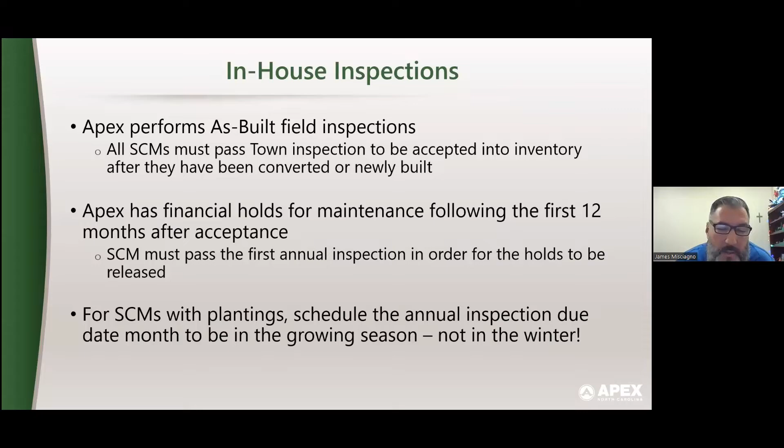So also, when it comes to SCMs, when you are scheduling your recently converted SCM, what month do you want those annual certifications to come in? Schedule your constructed wetlands and your wet ponds in the growing season, even if it's not 12 months from when you accepted it. I think it's extremely important that when third-party inspectors, throughout the life of the project, are looking at these SCMs and seeing the plants and everything that's supposed to be in there, it just reduces the amount of questions that come in. And it is better to see that annual certification come in with all the plantings that are supposed to be there.

So we are very fortunate in Apex. Like I said, we do have a dedicated staff member that performs our inspections. I'm very familiar with Phase 2 permits. I can't really speak to some of the other permitting out there and what the requirements are, but most Phase 2 permits do require in-house inspections every 5 years by the jurisdiction. So some municipalities may do 20% a year, things of that nature.

But here in Apex, we have found a new level of service by having a senior environmental specialist that basically owns our post-construction program. And he is looking at every single facility that we have. And currently you'll see here, we have 520. He's looking at every single one of them annually. And that has brought us a level of service that we have not had since we received our Phase 2 permit. It has been extremely advantageous.

One of the benefits of it is he'll perform these inspections 30 to 60 days before they're due. And by doing that, one, he's verifying the third-party inspections that come in, making sure they're accurate. But also, two, because we have great communication with all these owners and property managers, when he sees something that's out of line or there's a serious issue, especially if there's something impacting our water quality, he has a contact list. He knows who the HOA reps are. He knows who the property management companies are. And at that point in time, he's contacting them saying, hey, we have some serious issues out here. And again, this is prior to it being due.

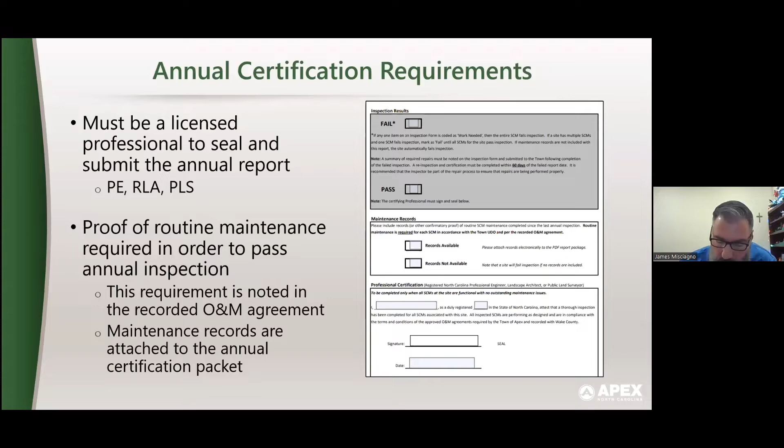That's when they'll go out and have some pond maintenance company or landscaper go out there and do all this work on that SCM. Well, we want to ensure that they're doing it year round, because again, that's what's best for our water quality. And our goal is water quality and compliance. So we mandate that they perform maintenance.

And for most of the SCMs here, when you have an O&M agreement, what I wanted to mention is make sure you have it per SEM, not a broad O&M agreement that covers 13 different types of SCMs. Because when you make it specific, the people who are really not in tune with stormwater, who may be reading these O&Ms, are realizing what their responsibilities are. Because the requirements to keep a bioretention cell and a constructed wetland in compliance may be completely different from each other, right?

So we also require, right from the beginning, O&M agreements, of course, on every SCM, construction plans, landscaping plans, planting lists, and of course the as-built supplements and certification packages when things are done, after they've been converted. So all these documents are key to compliance because, as I'll talk about in the next slide, people are always requesting this information throughout the life of these SCMs.

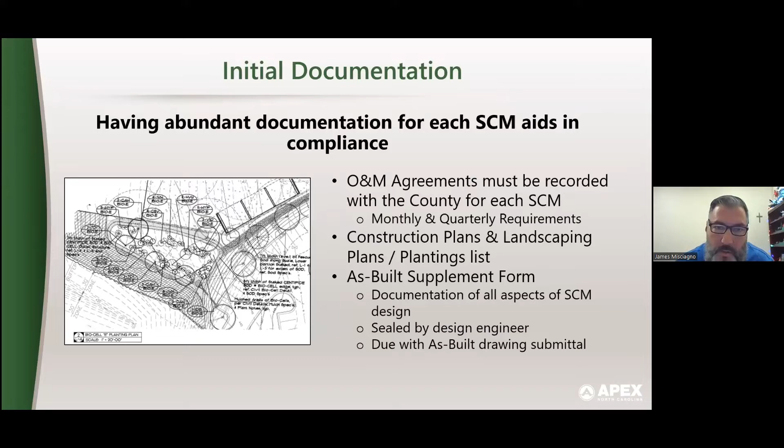So I call this the one-stop shop. So honestly, here at the town of Apex, because we've had such dramatic growth over the last several years, keeping up with the amount of SCMs that we have has been overwhelming to the point where we've had to dedicate someone, like I've mentioned. You may have files everywhere. You may have construction files in one place. You might have inspection files and ownership files here and there. You might have spreadsheets in different locations tracking different things.

And so for us, we're currently working with a private company to develop a stormwater database. And we really want a one-stop shop here. We want to keep it simple as much as possible. But when we get a telephone call, whether it's an HOA person or a resident, or people just requesting information, inspectors, certs, maintenance companies, we want to be able to go to SCM site ABC, pull that up, see the owner's information, the property management's information. Of course, we're talking about contact information here. Telephone numbers, emails, things of that nature. We want to be able to easily access all that information.

We want to be able to easily edit that information as these people change with the wind sometimes, management companies and stuff. But for me, what's most important, because I understand how much time is involved with it, is having your documents all in that same location. So when you do get that call, you can easily pull up an O&M agreement. You can pull up your construction plans, your as-built package, even the landscaping plans and planting list. For me, having all of that in one spot is key to compliance, because as your facilities grow, you're going to have so many people requesting that information on a regular basis.

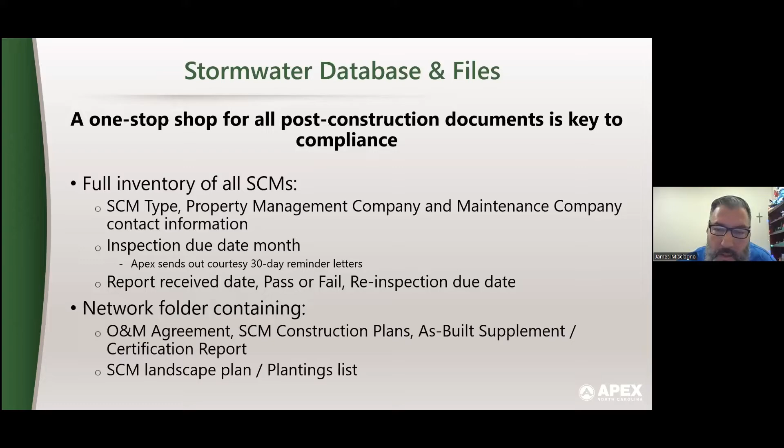It's so much better to not write their information down and tell them you're going to get back with them later, because you've got to pull all this information from multiple files. Now you can go right to your database, pull up the SCM, everything you can drag right into an email. So something to keep in mind.

So near the end here, of course, public information and outreach is another key to compliance for post-construction. Truth is, a lot of people have these stormwater ponds and things throughout their neighborhoods. Most of them don't even know that there's a stormwater feature. So having a good website right off the bat, I think, is key. And one that people can easily find. It prevents a lot of different telephone calls going to different departments before they actually get to yours to get information. So have some good general information on what SCMs are, what their function is.

For us, we have actual SCM inspectors and repair contractor lists on our website. This may save us some telephone calls that we get. People will look on the website and be like, oh, wow, here are some people that we can call to repair or inspect our facilities.

So I think that's extremely important. Meeting with HOAs and property owners on educating them what their responsibilities are, and how these SCMs function. A lot of these people who volunteer their time to be on HOA boards, and most of us know how brutal that is. These are people who typically want to learn things, and they want that education dropped on them. So when they know and understand the function of these SCMs, they're happy to educate other HOA members as they come on board.

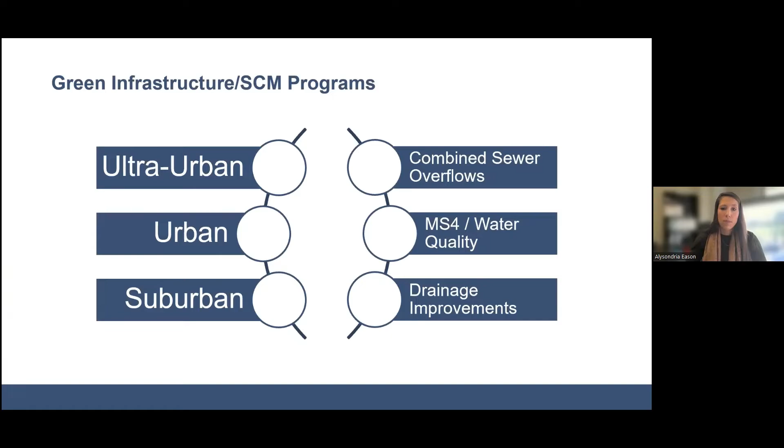So when we think of green infrastructure SCM programs, we can divide them into three main categories: ultra urban or large scale implementation, urban, and suburban. What those environments are able to accomplish and what their goals are generally fall into either combined sewer overflows, MS4 water quality improvements, or merely drainage improvements. Drilling down further into these, it's important to realize some of the main characteristics that may set them apart.

So for example, an urban or a suburban focused program may not have impacts that are as substantial, but they also may not have extensive amounts of funding to focus on stormwater alone, whereas a larger or ultra urban focused program would generally be more limited in space to implement SCMs, but they would have more impacts where they actually need to mitigate stormwater issues. Additionally, some of these larger programs may have larger funding sources to pull from. So it's really a balance of trying to accomplish their goals with what resources you have in front of you.

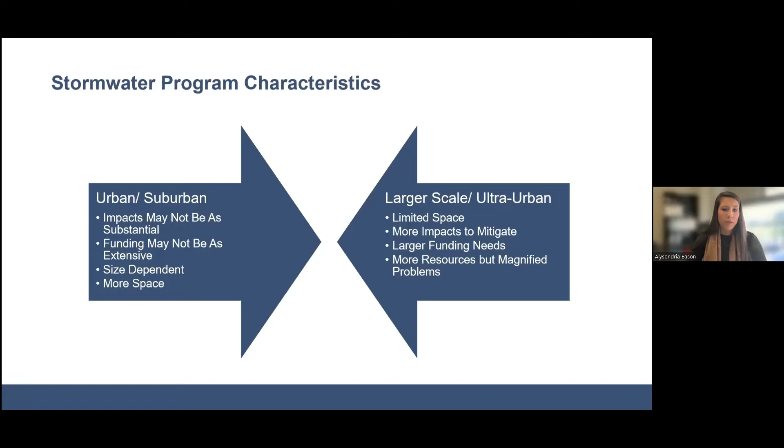So when we think about constraints, the full plethora of options, or things that, regardless of if you're a small program or a large program, a smaller suburban style city or something in the heart of Charlotte, looking at utilities. Some of these utilities have been there for decades and decades, and then others are new. And how does that fill in with capital planning?

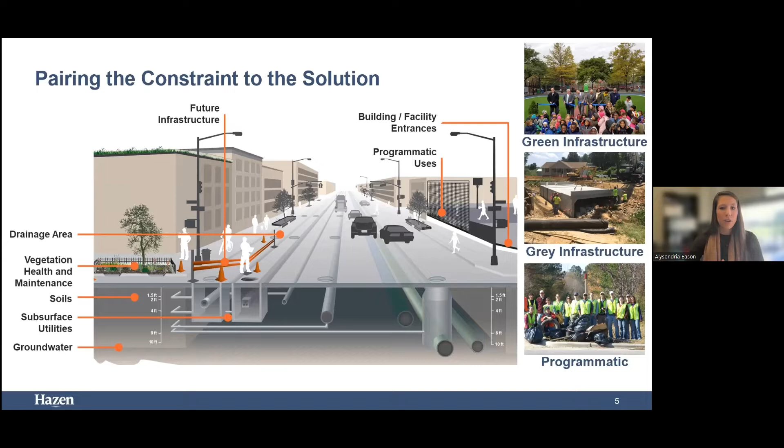So understanding programmatic uses, what existing soils are there, drainage areas, to be able to make sure that any SCM that's implemented is feasible from a cost-effective standpoint. Navigating these constraints is often a combination of green infrastructure, SCMs, gray infrastructure, and then the programmatic use. So it's really pairing the constraint to the solution.

So we plan, we organize, and then we design, because that format generally sets us up for long-term implementation, regardless of the size of your program. So for larger programs, they may already have more established program goals. And so they've already taken a look at what types of information are we interested in? Where do we need to be able to come back to look at, okay, we've already looked up this entire neighborhood and these are our only options.

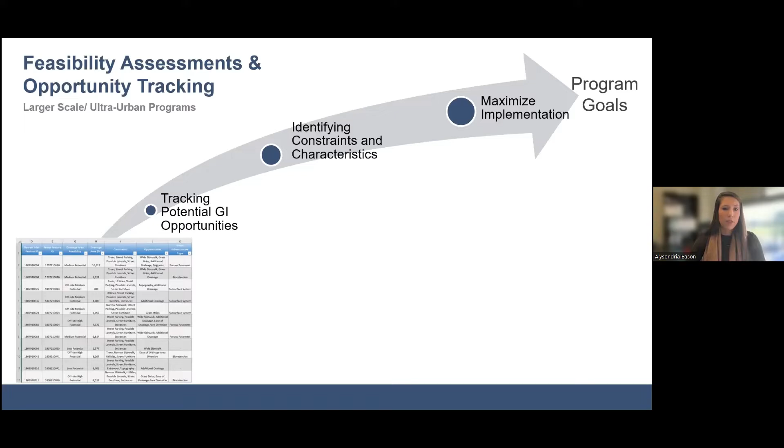So being able to look and track potential green infrastructure or SCM opportunities with information that would allow you to understand why you could or could not place an SCM in that area. So identifying those constraints, looking at the characteristics, and tracking that in a meaningful way that will allow you to maximize your implementation to accomplish your program goals.

When you look at a smaller scale, in urban or suburban programs, you may not have the resources or database to be able to track, or maybe you don't want to track in that manner, but being able to just keep record of areas that you've already visited, what those constraints were, even if that's filing those away based on an individual neighborhood. And this was kind of an example of a neighborhood in rural Virginia that didn't have stormwater infrastructure.

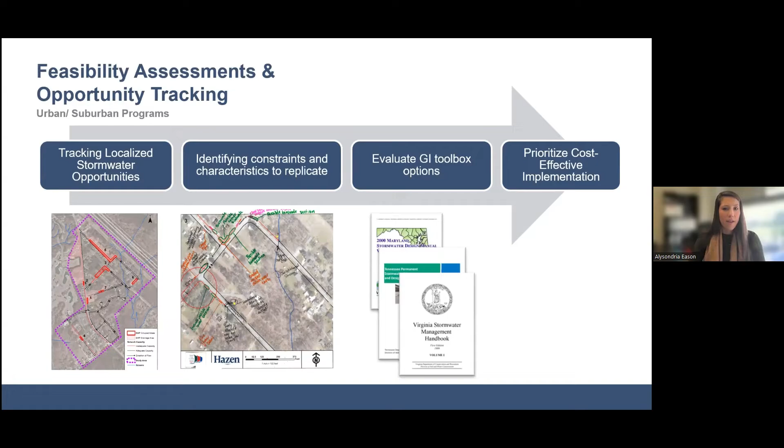And so understanding what were the options that they have available in their green infrastructure or SCM toolbox, and then being able to, just maybe with a simple Excel style database, weight and prioritize different characteristics of those SCMs in order to prioritize cost-effective implementation, kind of take care of that low-hanging fruit first.

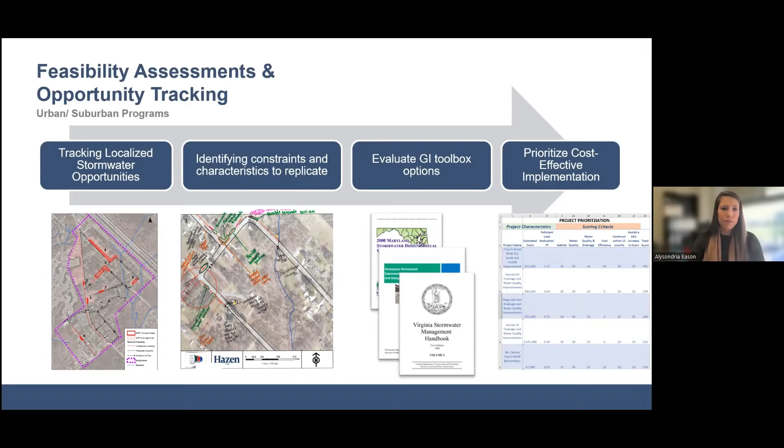So we have all the information. We know where we can put different SCMs, but we still have these constraints. We still have these challenges. Maybe it's steeper slopes on a road that has a lot of space for an SCM, and you can put something within the right of way. Or we have an area within a very urban part of our community, but there's a lot of utilities. So what do you do in order to capture the volume that you're designing for? And that's really coming up with different design variations.

So whether it's splitting the practice and hydraulically connecting it subsurface, and also, if you have an area with high slopes, planning for putting stone check dams within the subsoil and stone to be able to manage more water than if you didn't have that, and standardizing those small details around different configurations to look at each of the constraints individually.

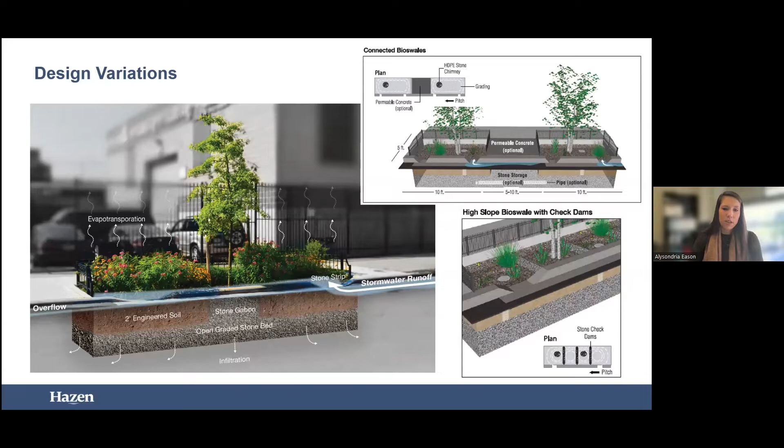From there, it's continuing to adapt the design elements. So many municipalities and localities have kind of their toolbox of options, but understanding that it might not be one size fits all. You might have an area where, because of the elevations, an underdrain is not feasible, or maybe because of the plethora of utilities, an underdrain is not feasible. So looking at ways that you can provide that passive inflow outflow, while also considering where this is going to be located. Is it going to be highly visible to the public eye? Those types of things.

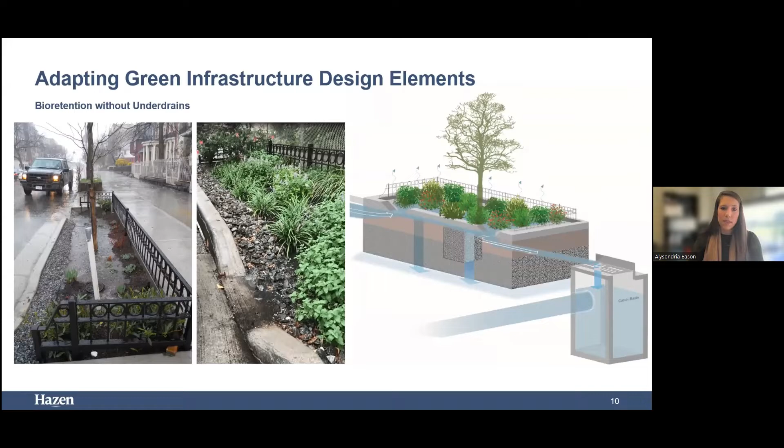Design standardization may look different at a larger scale. We've worked with programs in the past that wanted true design details where you have typical dimensions, so that whether you're doing capital planning or a private developer comes in and is required to implement an SCM as part of their development, they already have set options that can streamline the design process. They're already set in terms of widths that are approved, lengths that are approved, and anything outside of that would need special approval.

Predetermining planting schemes based on surroundings. So maybe within a certain area of the city or community, these are the types of plants that work. These are the planting schemes that work. Predetermining those also allows for a faster review and more consistent maintenance over time.

Another way that we've seen maximizing volume capture is using an iceberg infrastructure approach for that additional capture. So these work well within right-of-way areas, and especially in areas where you may be depth limited from an excavation standpoint. It allows you to maintain the surface space that you have and limits the surface maintenance requirements. You have less area for trash to get into.

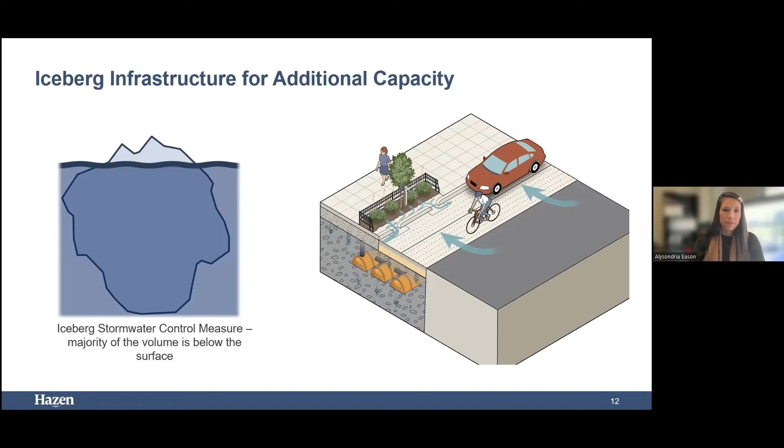A similar type of adjustment would be adapting green infrastructure or SCMs within constrained corridors. Part of this also leads into communicating with the contractor. Not every contractor is familiar with newer SCM designs or how to go about working within constrained corridors. So it's communicating that early, making sure that within our designs, we're considering the amount of space that would be needed.

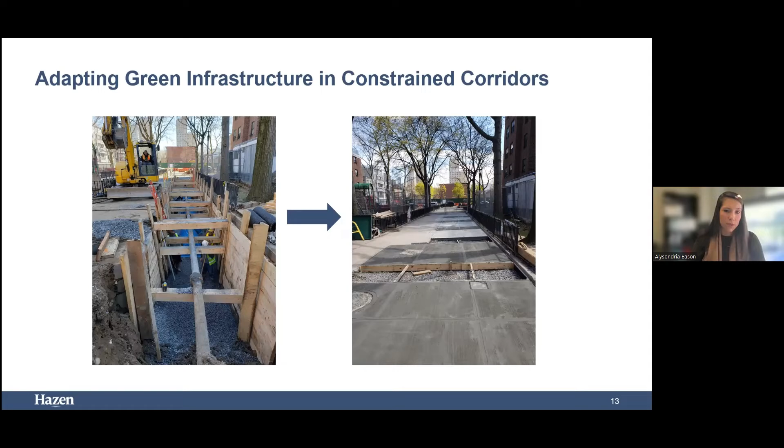Now, a full set of design details or design standardization may not be as warranted for a smaller urban or suburban program, but being able to generalize different design guidelines can also help streamline review. Predetermining planting scheme based on location would be an example. If you're in a park, you can use these types of plants. If you're within a neighborhood, it's these types of plants.

Just those small adjustments and small lists can really help streamline the designs. You're not getting plants and materials that are off the wall, but it also allows some flexibility where you don't have to have very stringent design standardization.

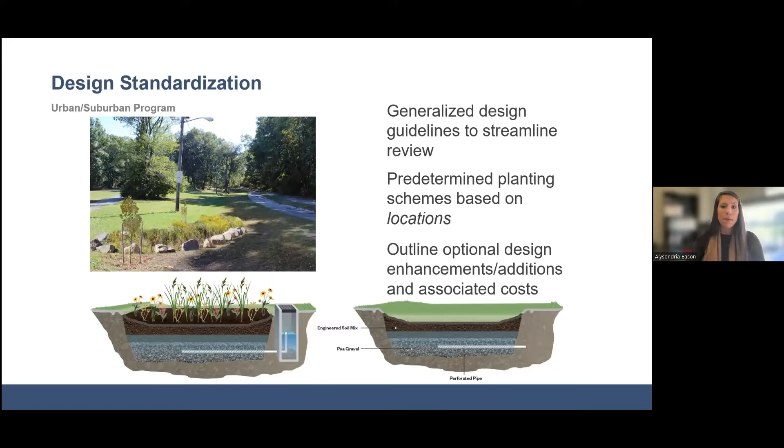Outlining optional design enhancements or additions and the associated cost with those. So something as simple as an upturned elbow to provide that internal water storage layer within a bioretention, or implementing a perforated pipe for future maintenance, that type of thing. I'll show an example of that in a minute.

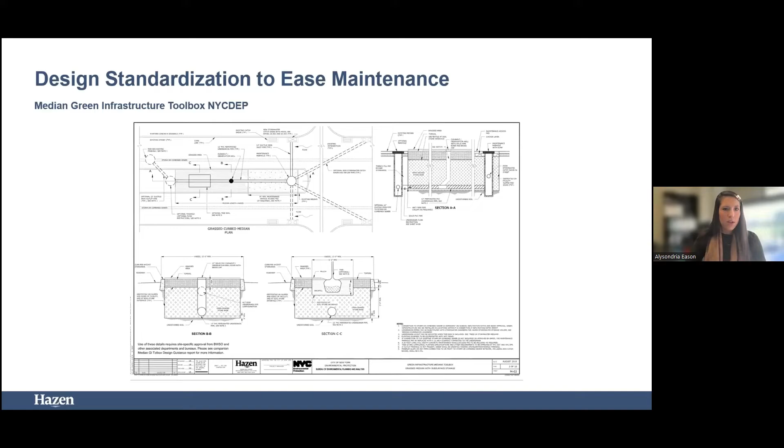So bringing the design standardization to what is needed long-term can really help to ease maintenance. So maintenance is kind of the theme, because without maintenance, any investment in an SCM or an SCM program is for naught.

So looking at how do we standardize maintenance, whether you're using details or just general guidelines, it's really pre-selecting what are the configuration and widths of the vehicles that are being used, what do our maintenance staff have available in terms of tools, and what kind of safety allowances would allow them to access the site safely while also performing regular maintenance at a given frequency based on what the O&M agreement was.

And so for this example, looking at a 20-foot minimum maintenance pad that had to be implemented within any sort of median green infrastructure that was implemented in New York City. This type of basic requirement allows the program to have flexibility, but also know that regardless, your maintenance staff will be able to access the site and perform the tasks that it needs to.

So how can we make better decisions? We've already kind of talked about it. Maintenance is key to maintain the long-term performance of these systems. And so it's really designing with maintenance in mind. One way would be to consider, like I said, the vehicles that are entering. So if you have a park, making sure that you're considering the widths of the adjacent pavement.

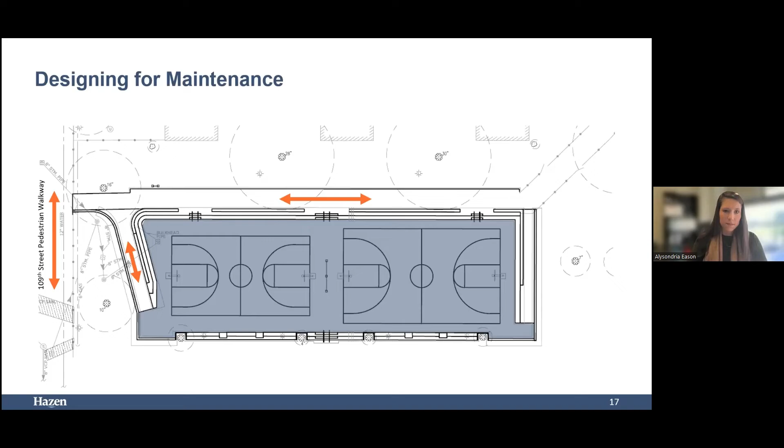Additionally, allowing maintenance to inform design. So allowing your program and what you're trying to achieve to be flexible and evolve based on what your maintenance crews indicate. So this is an example of a permeable pavement alleyway. And in early implementation, we noticed that the rough concrete bordering the initial part of the permeable pavement was actually collecting sediment.

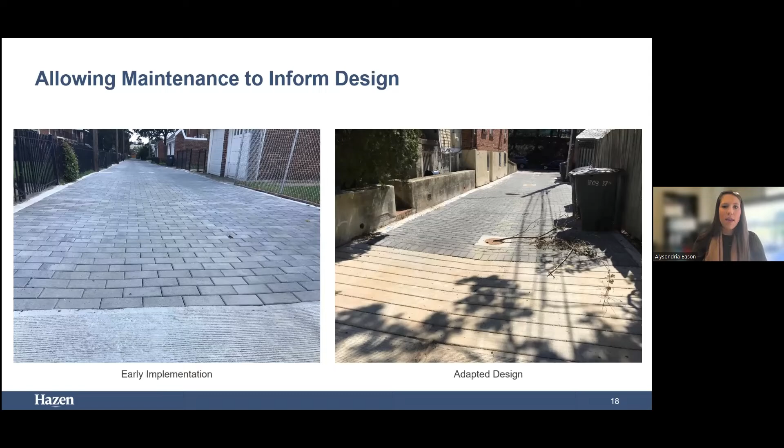So then in subsequent designs, we actually adapted the design to have more pronounced grooves in it and reduce the amount of clogging within that permeable alleyway. So that was a way of talking to the maintenance crews, understanding what they were dealing with, and then making the adjustments to designs moving forward.

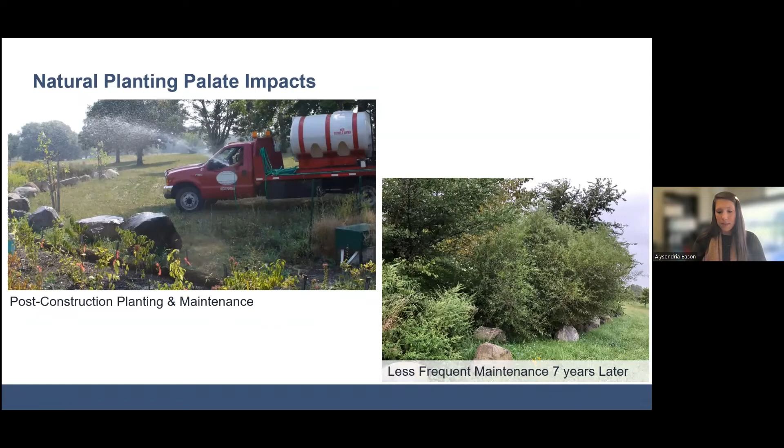On the flip side, in many locations, especially if it's in an urban or ultra urban area, the public may desire a more manicured or intentional planting scheme as compared to something with dense vegetation of native grasses. And so if future maintenance is reduced beyond what is required to maintain that manicured appearance, many of the previous benefits can be lost. You can see this picture on the left: manicured, intentional planting. Picture on the right: less frequent maintenance, same planting scheme.

So, bringing it all back to maintenance. This SCM on the right may still be functioning from a stormwater aspect the way it was intended, but public perception is also just as important when considering how this SCM will work long term. Are you going to get a lot of negative feedback from a neighborhood? Because that can be considered a constraint for implementing future SCMs in that area.

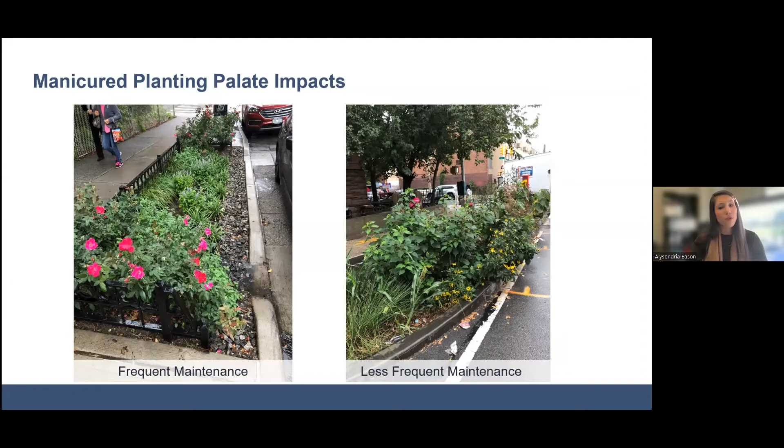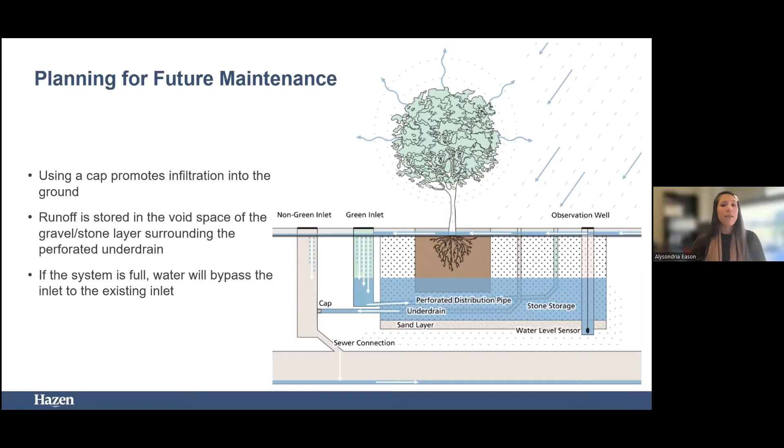And so one thing to consider is, where possible, implementing underdrains, perforated pipes, but just capping the end. This would allow you to promote the infiltration into the ground, but knowing in the future, should site conditions change, you'd be able to open that cap, have water bypass, and adjust for flows in the future without digging everything up or doing a complete redesign.

And so we consider looking at full life cycle outcomes. When you look at the constraints, whether you're tracking it within a table, an integrated dashboard, or just a database that you have in-house, look at what our options are for managing the stormwater now, and what our options are should maintenance become limited or our program so extensive that we have to reduce the maintenance frequency. What is the outcome of that particular SCM? So whether that's deciding upfront to increase your green infrastructure SCM capture volume to maybe 120% versus 100% of the design storm, knowing that in 10 years you may be closer to still 100%.

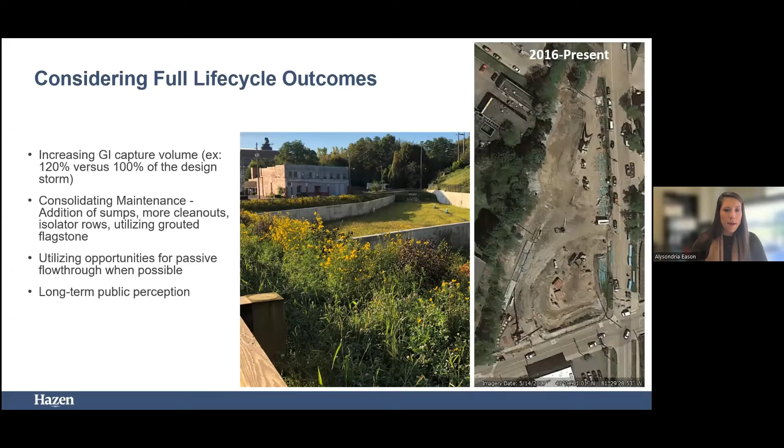Consolidating maintenance, so using sumps, additional cleanouts, having those labeled in a way that it's obvious to maintenance crews what they're looking at, utilizing opportunities for passive flow-through when possible, and overall, what's the long-term perception?

So it does all come down to maintenance staff input, regardless of the type of constraint, even if it's a utility. The people that are doing the work, having those conversations with them early about what equipment they will be using regularly, how the site will be accessed safely, record keeping, even communicating with your utilities to understand, if they need to perform maintenance on a line that's hydraulically connected between two SCMs, what type of tools they would be using, to help prevent damage to your SCM moving forward. And then landscaping input, key for stormwater controls, especially those with greening features.

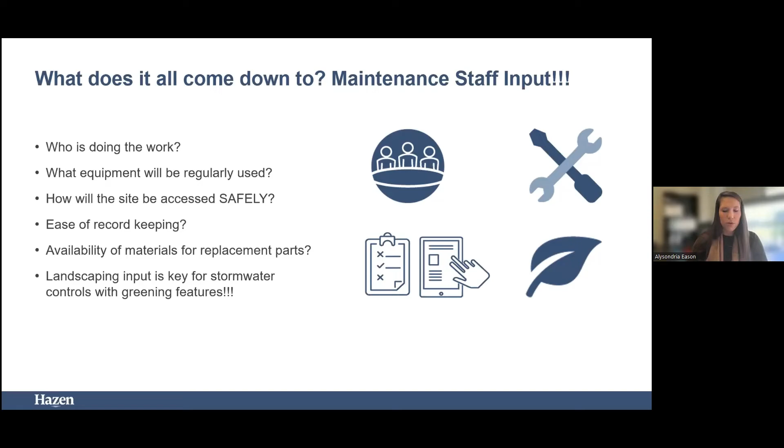So in closing, green infrastructure and specific SCMs do provide an array of tools to overcome stormwater challenges. And it allows you to take those tools, adjust and adapt them so that they can be implemented regardless of those constraints. Adapting designs through the planning, design, and construction phase is critical. Sometimes, as many of you may know, you start construction and there's utilities or tanks or something that you were not prepared for. So being able to make that adjustment, understand what options are available to you can really help proactively mitigate having to remove a system or that sort of thing.

And then consideration of potential future outcomes for those design elements and how that supports overall design efforts. Proactive consideration of SCM siting and maintenance challenges. That really informs the design process, and being able to look at those up front, understand what your constraints are and how common they are, allows you to set the stage for better implementation and growing your program overall.

Right now, I'm still seeing Alysondria. There we go. Sean, you may be muted. Oh, okay, I think I figured it out. All right. You're seeing the regular screen, right? That's right. Okay, very good. All right, give me one second.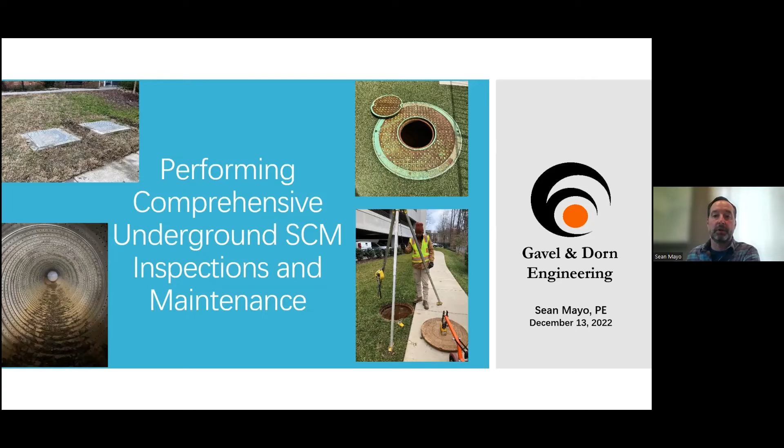Okay. All right. Well, as Craig said, my name is Sean Mayo, and today we'll be talking about performing comprehensive underground SCM inspections and maintenance. The majority of my experience related to underground SCMs comes from completing annual inspections. But today, I don't want to talk in depth about just the annual inspections, but instead have a comprehensive discussion of inspections and maintenance that should be completed from early design and construction stages all the way through the lifetime of the project.

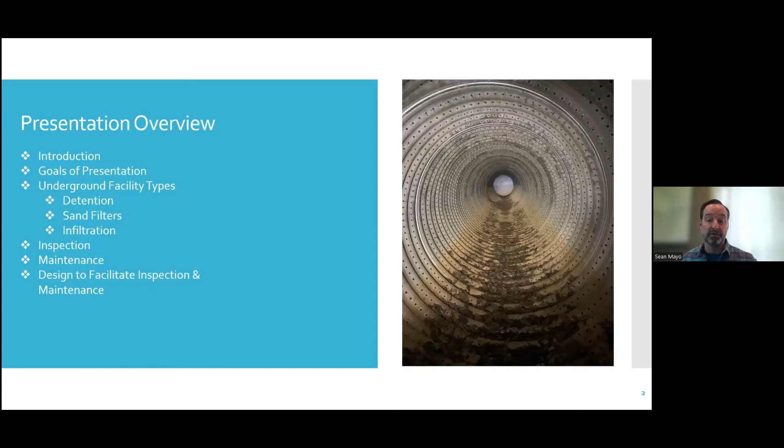These underground SCMs are extremely expensive to install, extremely expensive to repair, and maintenance is difficult if required. So hopefully some extra care during early phases of the project will ensure that the device is as maintenance-free as possible. Underground SCMs are really common in more urban areas, particularly in Charlotte, due to the buildable space that they save. So most of you would have walked over or parked on top of an underground SCM in your recent past without knowing it. There are three particular facilities that we'll talk about that all could be considered detention facilities.

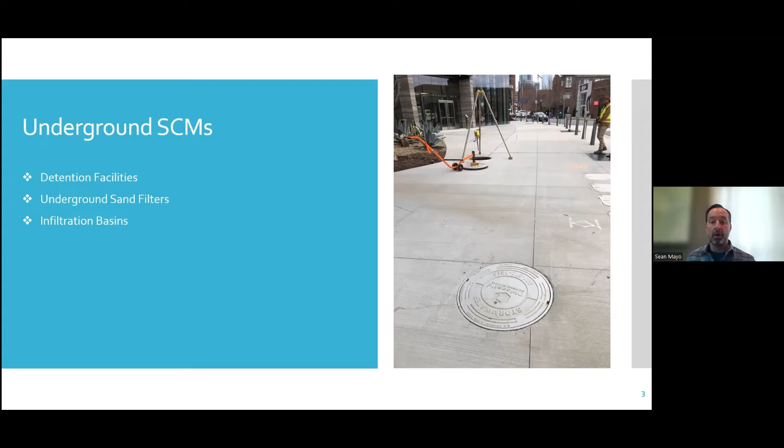So detention is just water being stored underground and let out slowly back into the storm drain system or the environment. Sand filters not only provide detention, but will also filter some stormwater through a sand layer in an underground vault to increase water quality. And lastly, an infiltration basin will also detain water, but instead of discharging it to a storm drainage system, some of that water will be drained through the soil to the water table. Now, all of these devices can be constructed of various materials, but mainly we see large diameter corrugated metal pipe, or CMP, or precast concrete vaults and structures.

So from an SCM perspective, underground facilities are unique because obviously they're underground, as their name says. It's not that they're not performing the same function as surface grade devices. The problem is accessibility. Accessing an underground SCM is considered a confined space entry, which requires specialized equipment and training. Most property owners or property managers, most engineers, and many contractors are unable to complete this type of work for that reason. So even obtaining access to looking at an SCM from the surface is difficult because manhole lids can be heavy and require special equipment to open.

So all of this is to say that inspection and maintenance of underground SCMs is not a do-it-yourself activity for a property owner and makes basic maintenance and inspection very difficult. So starting with inspections, there are four types I'd like to briefly talk about.

Construction inspection in parallel with shop drawing review is critical to ensure that the design intent is met by the stormwater fabricator. Engineers should be involved in the shop drawing review at this time. Engineers should also be involved periodically during construction inspection to ensure that the installation meets requirements both from a structural design and a stormwater design perspective.

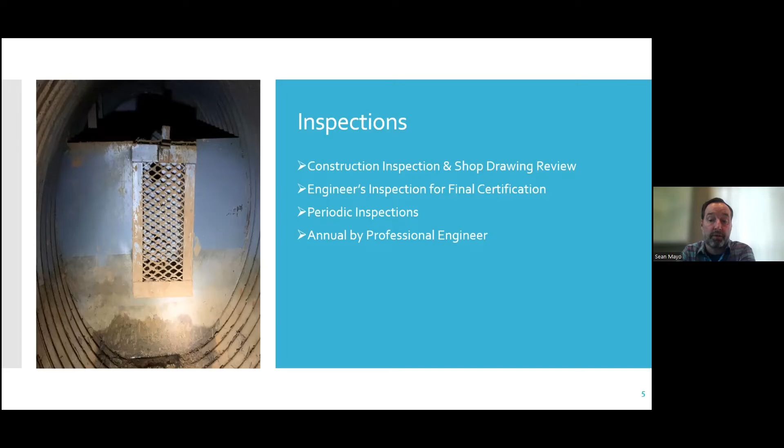The design engineer will also be involved in the final certification of the SCM upon completion of construction. And finally, once the SCM is put into service, from that point forward, periodic inspections and annual inspections are completed to ensure the SCM complies with required stormwater regulations.

So for an underground SCM, it's not uncommon for a design engineer to obtain permits for an SCM facility. And then the owner will send those design drawings to a custom stormwater fabricator. That fabricator will then modify the design as needed to allow for use of their typical precast vaults or some other stormwater system that they have designed or patented. In most instances, the changes are minimal.

However, there are times when the change may look significantly different from the original design or have some modifications to the design. So if the engineer's original plan was complicated or not clear to the stormwater fabricator, changes are sometimes introduced into the design that have a big impact on the SCM function. So it's key at this point for the engineer to review the shop drawings and ensure that the construction plans match the intent of their design, and also to ensure that the new design is maintainable.

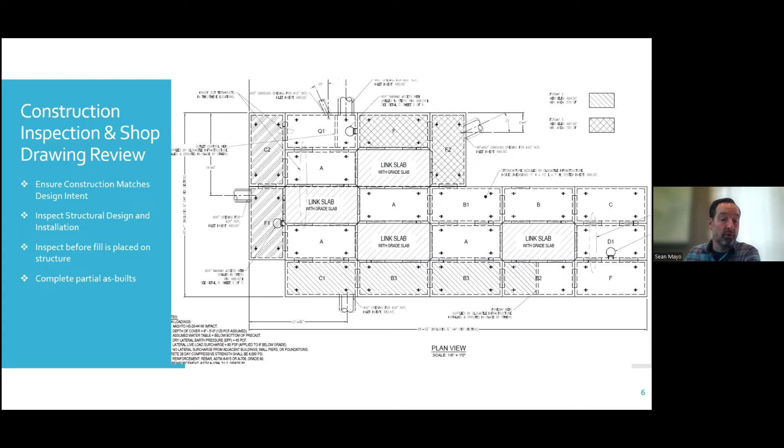So for some reason, the stormwater fabricator, rather than follow the original plan, extended the clean out through the vertical sand filter chamber wall at the upper end of the facility. And it's unclear whether the fabricator understood that the area was to be a wet forebay. However, if the design engineer had inspected the final shop drawing for the sand filter, ideally they would have identified that installing the clean out in the wet forebay was not feasible.

This installation not only increased the likelihood for the clean out to leak and drain the wet forebay, but also from a maintenance standpoint, the clean out would not be functional because the clean out would be under 4 feet of water and sediment. If and when the under drain clogs, there would be no real way to access that.

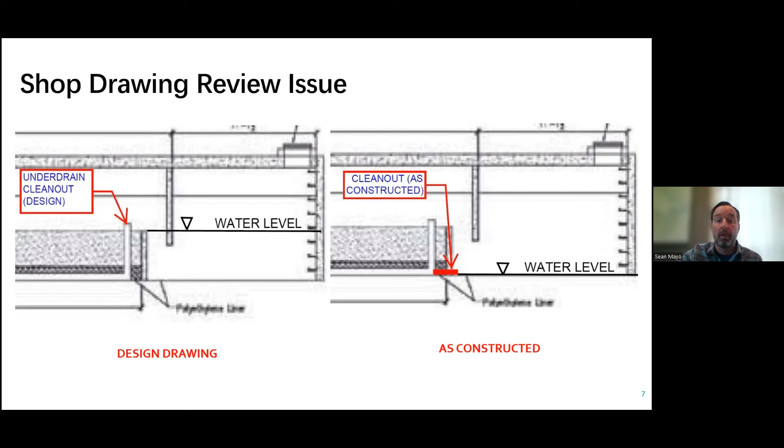So post-construction, the design engineer will complete an inspection for final certification at the end of construction. Ideally, the engineer would have completed some inspection during the construction stage as well. And at this time, there should be no surprises regarding the design of the SCM. However, this inspection is most critical to protect the owner from future costs for maintenance and repairs.

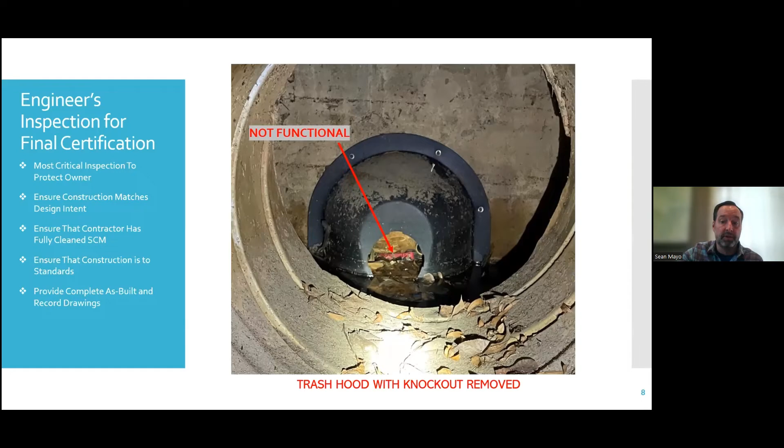My experience has been that engineers do not take the necessary time to inspect a facility prior to signing that certification. Most likely, this is because of the unique nature of the underground SCMs. Engineers are not necessarily equipped to enter confined spaces and cannot enter the facility, which leaves them unaware of conditions in the SCM. And without proper inspection at this juncture, the owner can be left with SCMs full of sediment. They'll have poor construction that will lead to future maintenance issues and are not meeting the intent of the stormwater design. So every engineer, before signing off on a final certification, should ensure that they or someone who fully understands the design intent of the SCM thoroughly inspects the structure.

It's not necessarily a design issue, but does relate to the engineer's responsibility at closeout. This is going to be extremely expensive to clean for the owner. As the engineer, you're taking on that liability by saying that the facility is compliant with PCO.

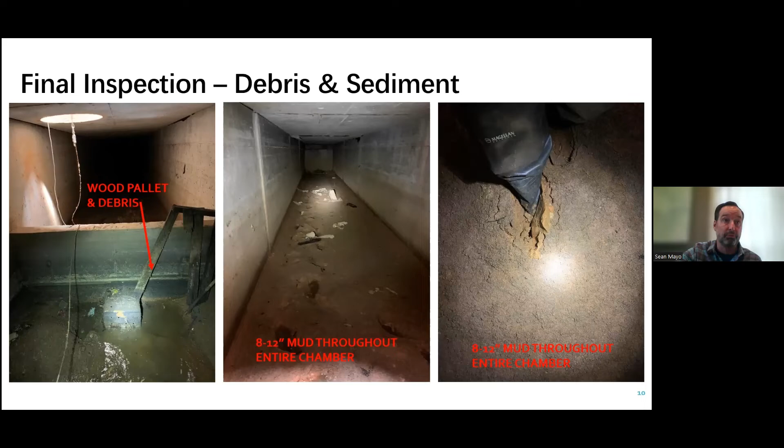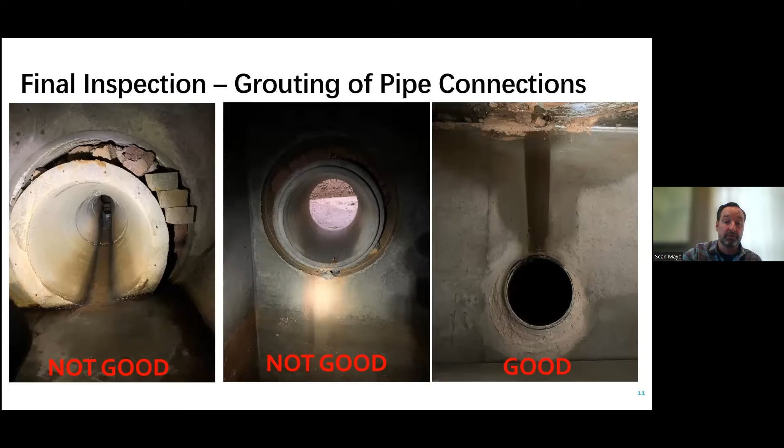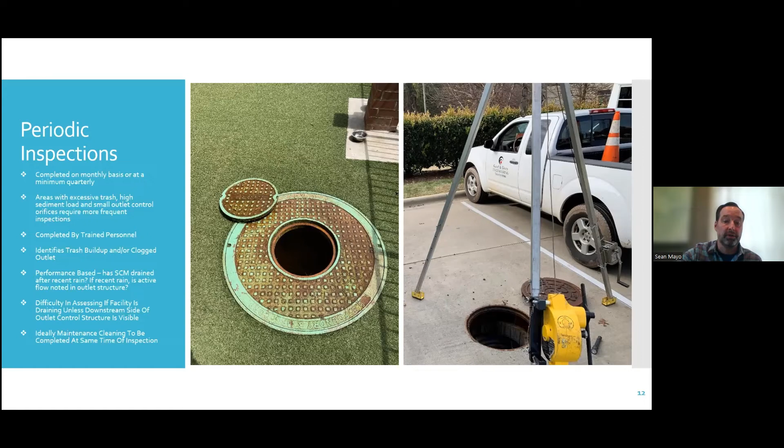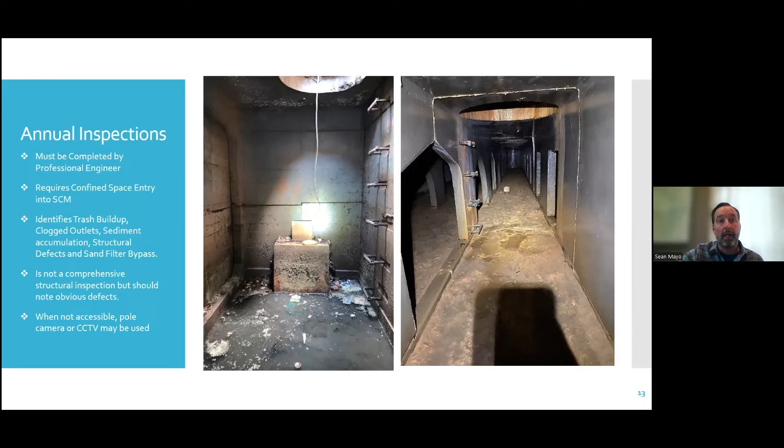Specifically for detention facilities, the goal of the inspection is to confirm that the SCM is in compliance with the stormwater ordinance, which primarily means is the device holding water as needed and then draining in an appropriate amount of time. The most common issue we're going to see is trash and sediment buildup. Trash and sediment buildup on their own does not imply that the device is out of compliance. All devices have some amount of sediment and trash.

Looking at the SCM, we will assess the device based on the actual performance. Is the facility draining? Is there any clogging? And what is the likelihood that the device will continue to function as required? We'll also note or address some more obvious structural issues as noted, but it's not a primary focus of our review. If a device is non-compliant, we will note minimum required repairs. Lastly, we will also provide recommended repairs for a device if we note that common construction or design improvements could prevent future maintenance issues.

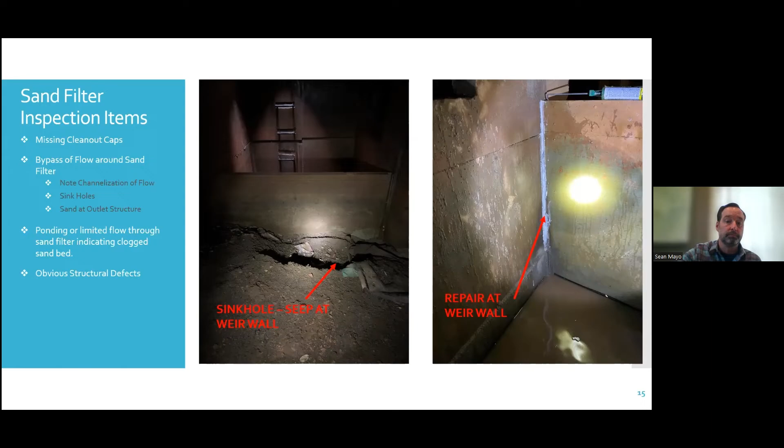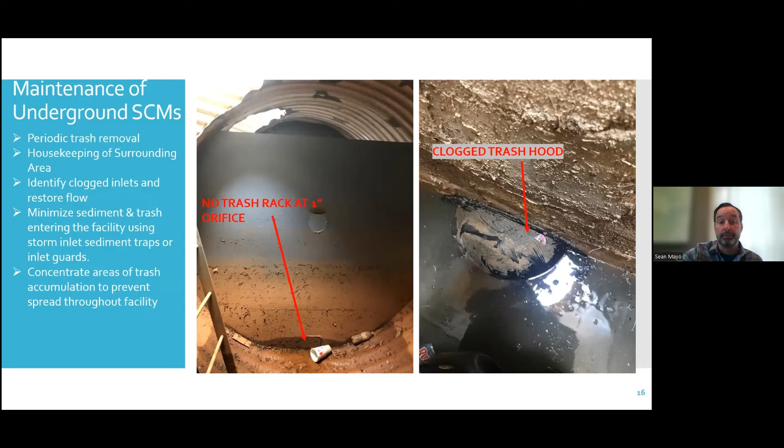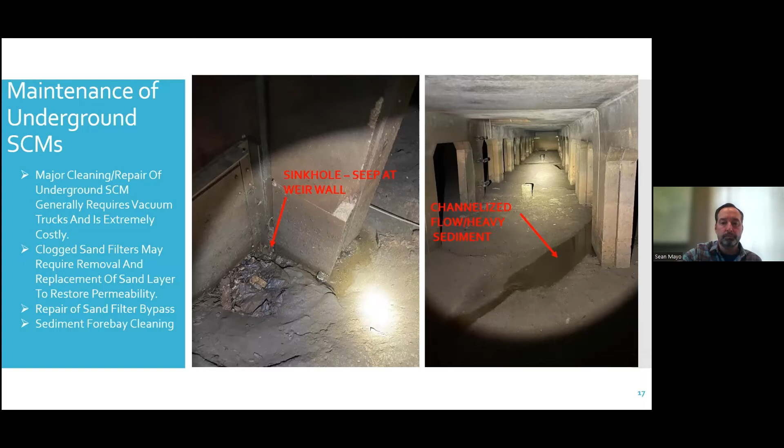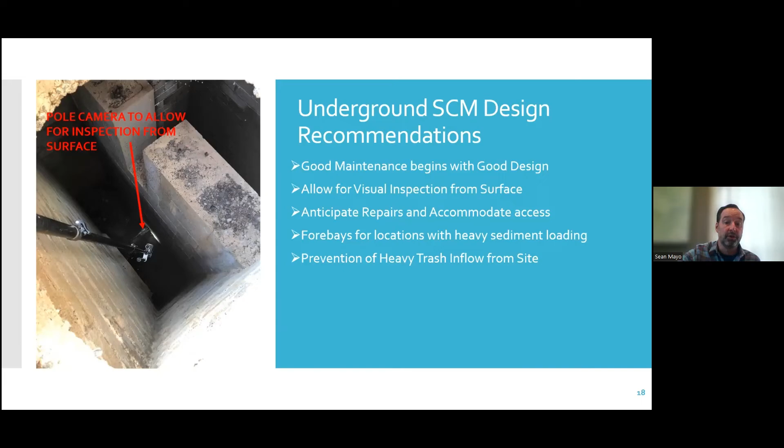So in the few minutes I have left, I'd just like to touch on some SCM design recommendations that hopefully will help with maintenance and inspection of underground SCMs. The main point being that good maintenance begins with good design. Making key locations visible from the surface, anticipating repairs and concentrating debris and sediment into accessible locations should be the goals of the designer.

Regarding access, the engineer should anticipate the use of vacuum trucks and other heavy equipment for typical maintenance and cleaning, as well as major repairs. Ideally, paved access in the vicinity of the outlet control structure will be provided. Additionally, for sand filters, larger access manholes or hatches will be provided to facilitate the removal and replacement of that sand filter.

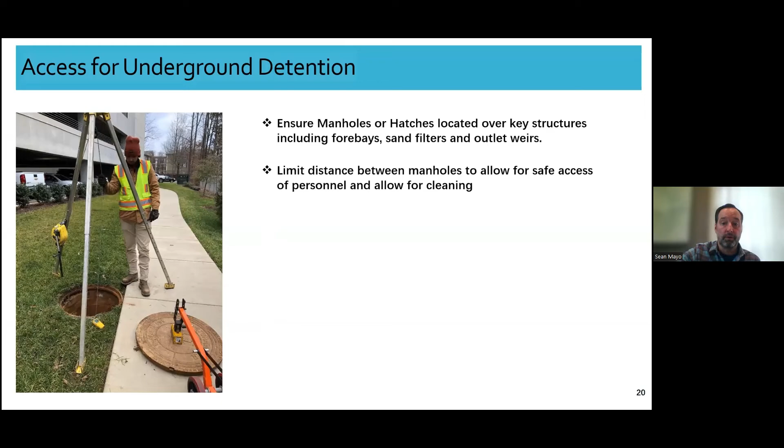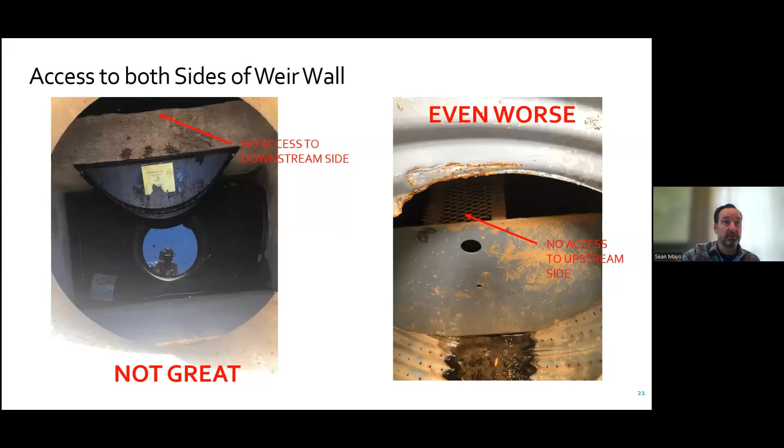So the number one maintenance issue with all underground facilities is clogging of the trash rack or low-level orifice, and then cleaning of that area. Access directly over the weir is critical for that. Ideally, the outlet control weir is accessible from both sides for maintenance and can visually be observed from the surface. Full accessibility to the upstream side is the primary concern to allow for trash removal. And at a minimum, the downstream side should be visible so that the inspector can confirm that smaller orifices are draining.

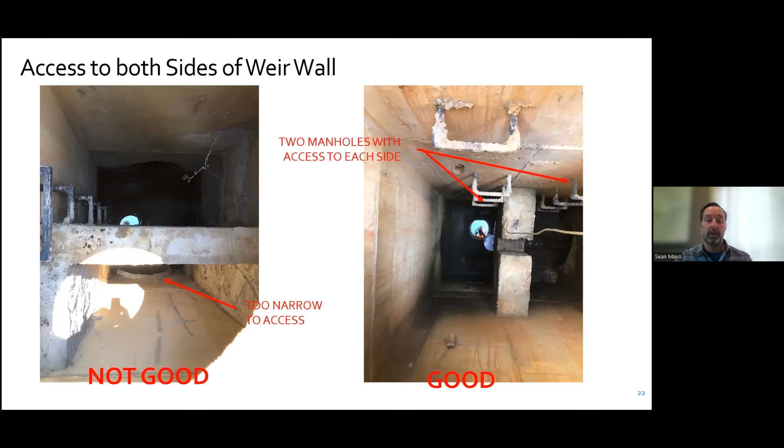So with the goal of limiting the amount of cleaning and clogging, I would just like to discuss trash racks and trash guards for a minute. Trash guards are essential for underground SCMs, and selection of a trash guard should include some thought about what size orifice you are protecting. I would recommend installing trash protection on all orifices located on the floor of the SCM, especially ones 6 inches or less. It's also essential for all small orifices less than 3 inches to be protected against non-floating debris.

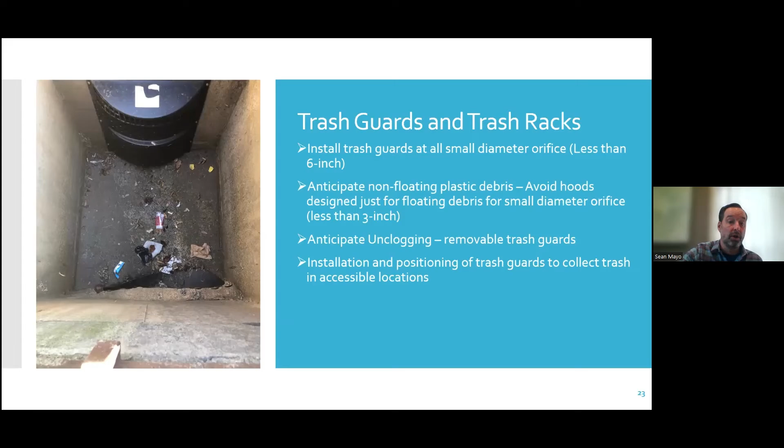So the underground detention will see large amounts of trash, debris, and sediment. An engineer should anticipate lots of trash in areas such as public parking lots and install trash racks and ensure easy access to clean. It's surprising how many underground facilities will be without trash racks. Particularly the CMP structures seem to have a lot less thought put into this.

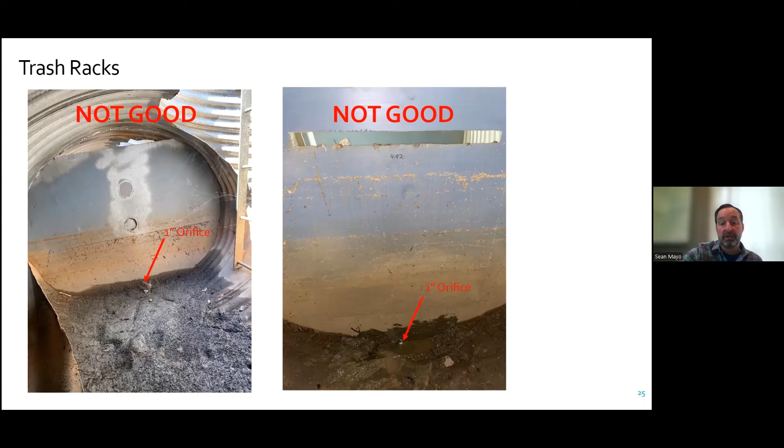Both these pictures are typical of what you might see in an underground facility, with heavy sediment and mud. They need to be protected with a trash rack, ideally with access over the weir, in addition to the sediment removal after construction.

Another common thing we see is the incorrect use of trash hoods. Shown here is a trash hood that does not have any holes or perforations to allow water through it, but does have an open bottom to allow water to pass under and up to the orifice. This functions like an oil water separator where floating oil and debris is held on top and removed or vacuumed out. And this would be appropriate for a larger outgoing pipe that will not clog if an occasional piece of trash slips by the hood.

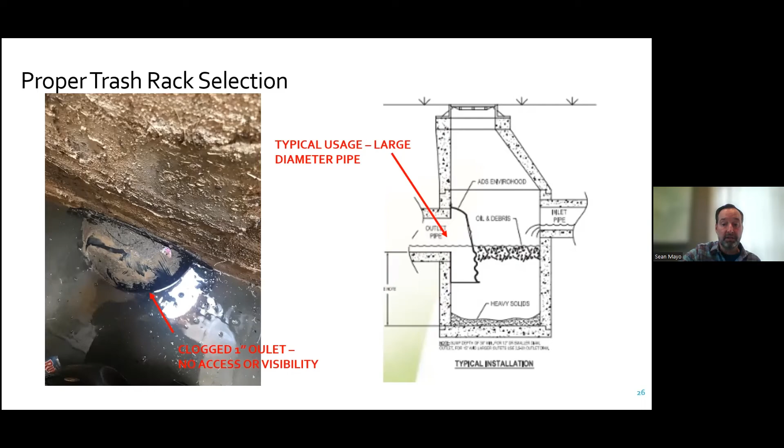However, you have to remember that lots of debris like plastic bags, chip bags will not float, but they'll instead be suspended in the water column. This type of trash hood will not prevent non-floating debris from bypassing the device and clogging those smaller orifices. A more appropriate trash guard would be a wire rack or a plastic guard that can be cleaned and where you can visibly see if there is a clog.

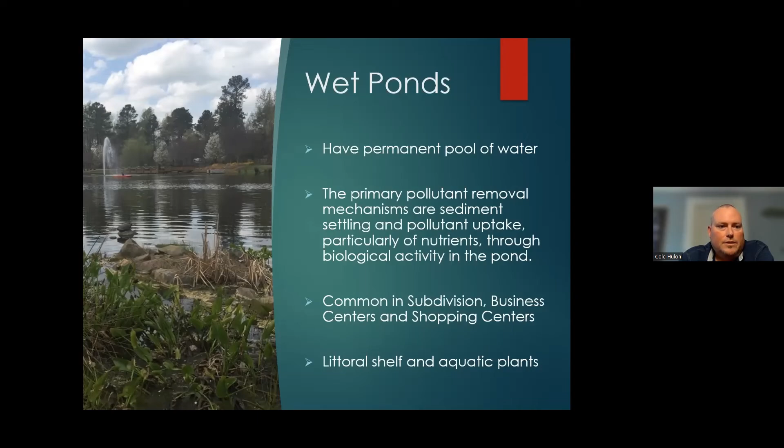All these things can increase the amount of nutrients coming in regularly, especially after heavy rains. One thing to note is the littoral shelf, and all the plantings in there do help with mitigation of some of these nutrients. However, we can also increase this.

One of the things correlated to water quality is excess algae growth. Poor water quality is going to include low dissolved oxygen as the main driver. Temperature: the higher the temperature, the lower the oxygen saturation can be in those water columns. A high level of nutrients, of course, is also another sign of poor water quality. The nitrogen, the phosphorus, and this is all again coming from the runoff, fertilizers, parking lots.

Well water can actually be a very common agent that increases phosphorus loads into some of these stormwater ponds. People don't like to see their ponds dropping. With us maintaining a lot of these, they'll actually put in wells, and sometimes these wells can be high in phosphorus and cause more issues with water quality. And then again, you have your other issues that could include excess animal activity like geese, or even being downstream from a dog park. That can add all kinds of poor water quality issues.

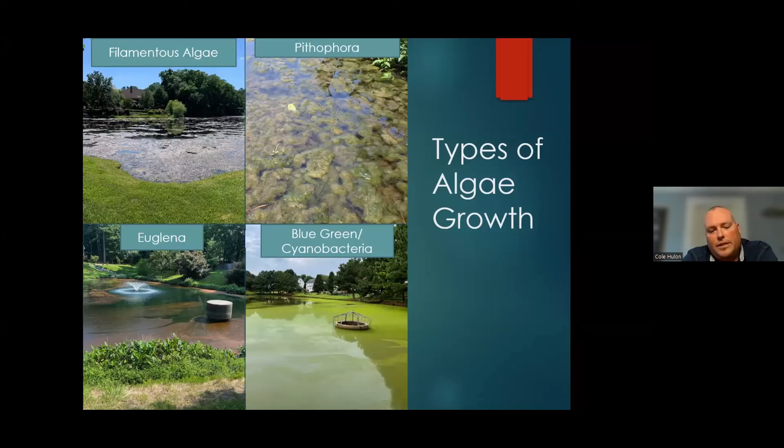Euglena is normally the red film that you see on the surface. That's on the bottom left, and it's again a common algae in this type. It's not a terrible algae to have, but it does have a very aesthetically displeasing value to it, being red. Now the other thing is this blue-green cyanobacteria is the big topic right now, so everybody's talking about harmful algae blooms and the wildlife issues that they can cause, even the respiration issues they can cause in humans. We have to deal with this on a regular basis, and again, it's due to high nutrient levels and increased water temperatures.

So what do we need to do whenever we see algae like this? It's always reactive treatments. You have to use your contact algicides and herbicides like copper-based algicides and even diquat dibromide, all of which can actually hinder an ecosystem if they're used improperly. You want to make sure that all these products are used properly and done by a professional, so that we don't destroy the ecosystem around.

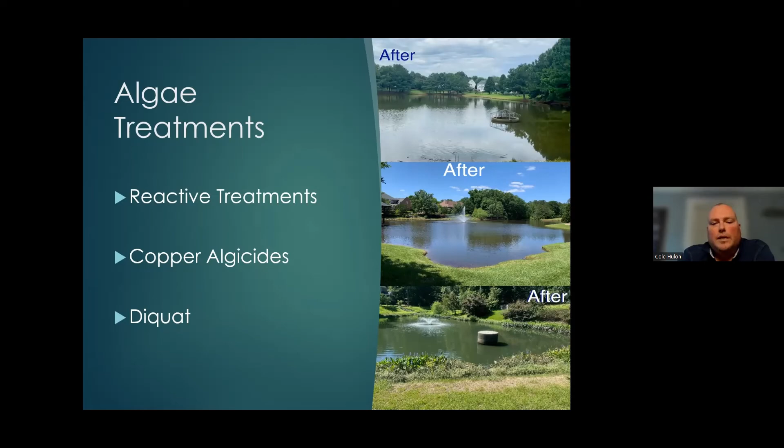So anyway, enhancing the water quality and ways to do so. We kind of came to the realization one year to just treat the source of the problem, try to be more proactive in the treatments. If you start enhancing water quality, you can reduce the amount of algae growth over time. One of the biggest things with water quality is increasing oxygen throughout the water column. This is going to require aeration, of course. Aeration is a very good tool in the pond management business. Not only can it be aesthetically pleasing, but it does enhance water quality if you're able to get oxygen throughout the water column. There are all kinds of products out there, and we'll go over a few of those in a little bit.

The other driver is the need to reduce nutrients in the pond, particularly phosphorus. Phosphorus is one of the limiting factors that algae needs to grow. Nitrogen is readily found throughout the air and everything else, so why not try to limit the phosphorus content? That could be one thing that we can attack with certain products. Again, there's an aspect of reducing muck layers. We can increase bacteria activity. There are all sorts of products out there as well that can increase this activity to help break down the muck layers and help reduce nutrients over time as well.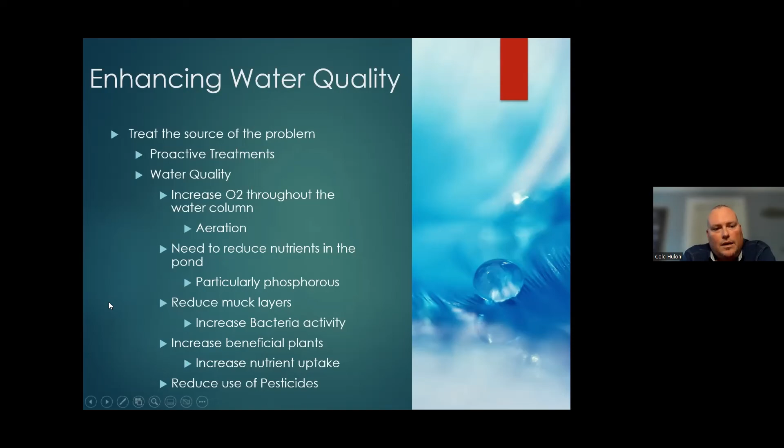Increasing beneficial plants. A lot of these ponds that we managed either don't have plants, they didn't survive after the initial planting, or there were ordinances where they didn't require plantings. Actually, just doing plantings around some of these ponds can really help increase the nutrient uptake. And then, the other thing is with all these items, if we incorporate these things, we can reduce the use of pesticides. You're not always going to stop their use, but you can definitely reduce it.

Enhancing water quality, again, aeration. We've found that there is a direct relationship between oxygen levels at the sediment-water interface and the water quality. The more oxygen you have over the sediments, the better your lake water quality will be. This is basically saying that down at the bottom of the pond, if you have low oxygen levels, your total phosphorus levels are going to be higher within that water column in that area.

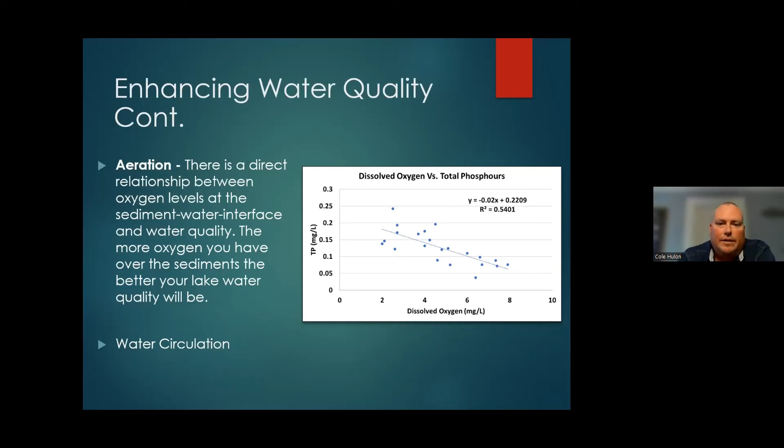And algae starts to grow on the bottom of the pond in the beginning of the year, and that's where it's mostly found. So how can we help with this? And that's the thing, is to add water circulation. So we want to get water circulated down to the bottom so we can increase those oxygen levels down there and reduce total phosphorus.

Then, another option is a floating fountain. They're not always the best at adding oxygen, especially when you have a display. They're only going to do that top layer, but they do have an aesthetic value that you can at least get some oxygen added to these ponds, and also aesthetically please the HOA that's around it, or even a business park. They all have their issues.

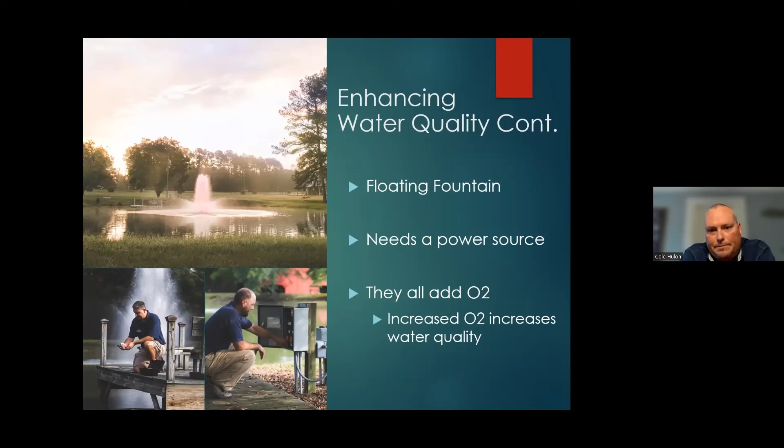These are going to need a power source, whether it's solar or actual power getting down to the ponds. One thing that we notice is there's never power at the ponds, so one thing that could possibly be a part of the building process is getting power closer to the pond's edge so that we can actually get this aeration down to it, and then increase the water quality this way.

So here's an example of what's going on. On the left-hand side, it says no oxygen. We don't have any agitation, no surface movement, no circulation. So we have bad water quality and it basically cannot sustain life. Underneath the thermocline, it's 0% oxygen levels down there. Your bacteria is anaerobic, so it's going to be slow to break down any kind of nutrients or sediments down there. You want to try to get oxygen down to the bottom.

So what happens if we put surface aerators in there or even fountains? You have some better oxygenation at the surface. You have that agitation where the transfer of oxygen can happen. That still will have a thermocline that will not allow oxygen to hit the bottom of the pond, where we need that bacterial breakdown.

If we have full circulation, say like a diffuser, you'll be able to get that oxygen just about all the way to the bottom. And you'll be able to get more increased oxygen on that sediment layer, increasing the bacteria and helping the breakdown of muck layers and nutrients as well that way.

There is a new type of aeration that's come out, and it's fairly new to the industry, but it's actually oxygen saturation. So they're pumping oxygen directly into the bottom of the ponds, and it's at a slow rate that doesn't disturb a thermocline. The thermoclines can be highly beneficial to some of these warmer, shallower water ponds for ecosystem survival. But by pumping oxygen directly down, they found that it enhances the water quality tremendously and is able to reduce algae growth over time greatly.

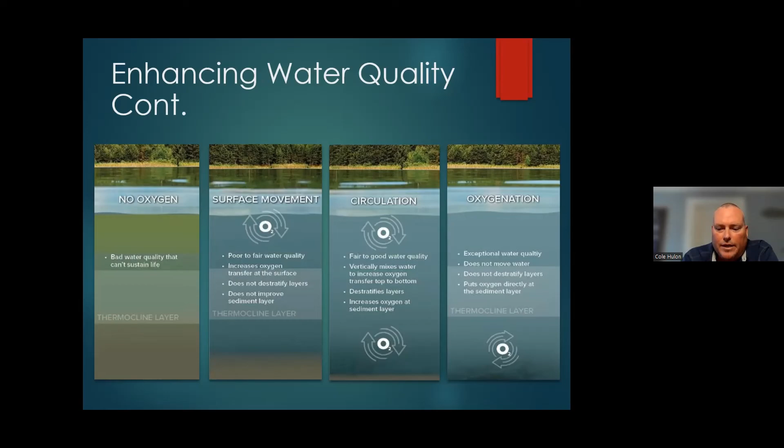So other ways to enhance water quality: they have nutrient binders available to us, and this can include aluminum sulfate, or alum. This is normally put out as a granular. They also have liquid forms of this, but it is a phosphorus binding product that is a flocculant. So as it moves throughout the water column, it just drifts down and settles out and pulls sediments and phosphorus out of the water column.

The only issue with this is it's easily released from the phosphorus bond, and the phosphorus can reanimate back into the water column. But it is relatively inexpensive and can be a useful tool when you're doing treatments on ponds and water columns like this.

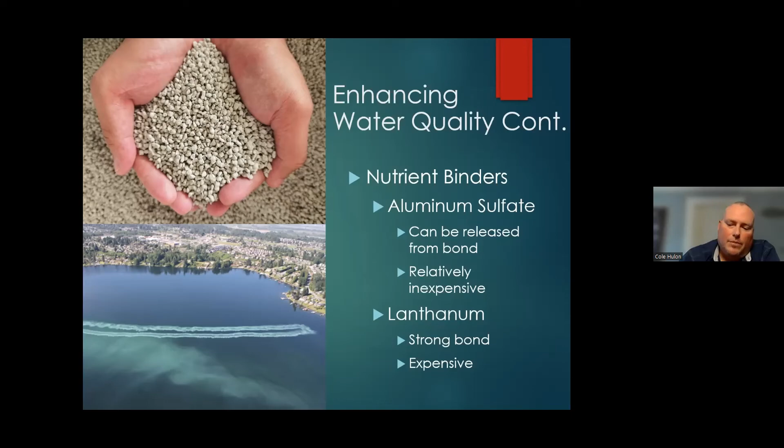A new product that's come out to pond management is lanthanum. It is another heavy metal similar to aluminum sulfate, but lanthanum is a stronger bond to phosphorus. The only issue with it is that it is a heavy product, normally a granular product, and it is pretty expensive when you're discussing trying to take high phosphorus levels out of some of these ponds. And plus it's also labor intensive.

Moving on into beneficial bacteria and enzymes, again, enhancing bacterial growth can really aid in the breakdown of muck layers and nutrient levels at the bottom. So, they have products that are muck reducers, then there's also enzymes, all of which basically increase the bacteria levels, beneficial bacteria that can do all sorts of things, and that includes the breakdown of muck layers.

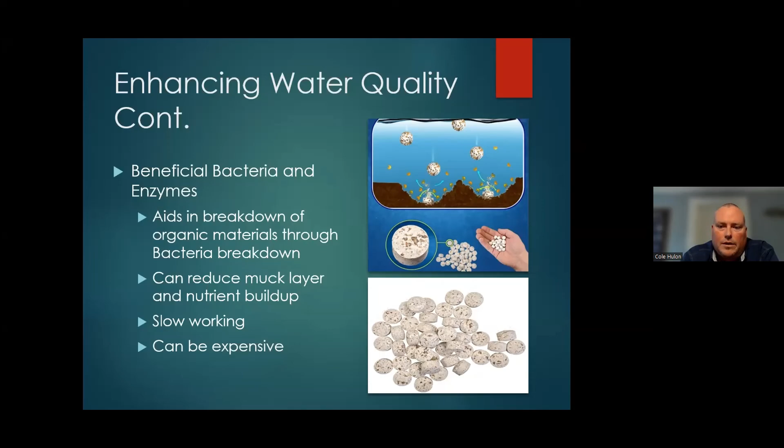They are slow working. It is living organisms that we're relying on, and if you do not have the proper oxygen down there, it's going to take a while. But they can be helpful in the aid of pond management and water quality enhancements. But they can also be somewhat expensive depending on your goals. Using them as a part of the management tool, they become very useful and reduce product usage of normal copper algaecides and herbicides.

Going into another type is polymer logs. These are available to anybody, but we found that placing polymer logs near aeration or moving water areas can actually distribute the polymers throughout the water column. They help to remove turbidity and also can bind to nutrients, phosphorus being one of them again. By adding them next to an aerator or even a fountain, they can be spread out faster throughout the water.

And you can see our before and after picture here of a sediment-infused pond with a lot of clay that would not just settle out. So we added these polymer logs to the diffusers that you see out there, and it sifts out the sediment and really can clear up that water to make it better water quality in general.

Going to a biological kind of water quality enhancement is of course the plantings that we're doing. Most of these ponds, again, have low planting densities due to either improper plantings or just predation even. The geese can really take their toll on some of these ponds. By increasing the plantings and planting them with the plants that are going to survive, sometimes you can't get the normal planting to actually take. So you need to find the plants that will take in some of these ponds and their poor soils and increase those types of plants.

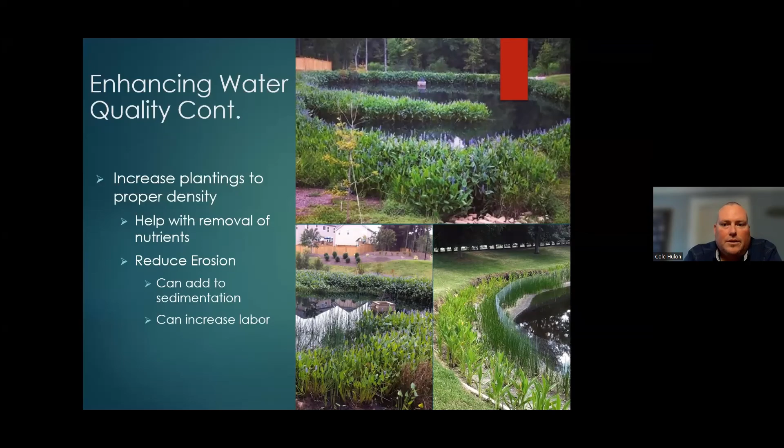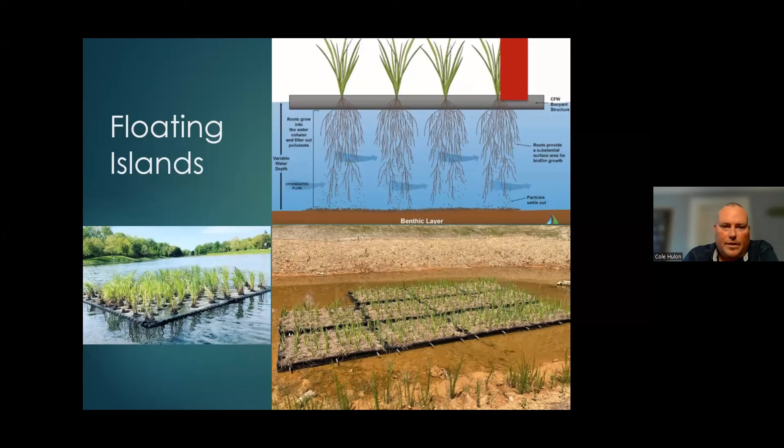Then they get really heavy, and if left unmaintained, they can be quite costly to remove and replant. It's about every 2 years that they need to be replanted. So they are, again, labor intensive, but they do have their definite fit in this type of system.

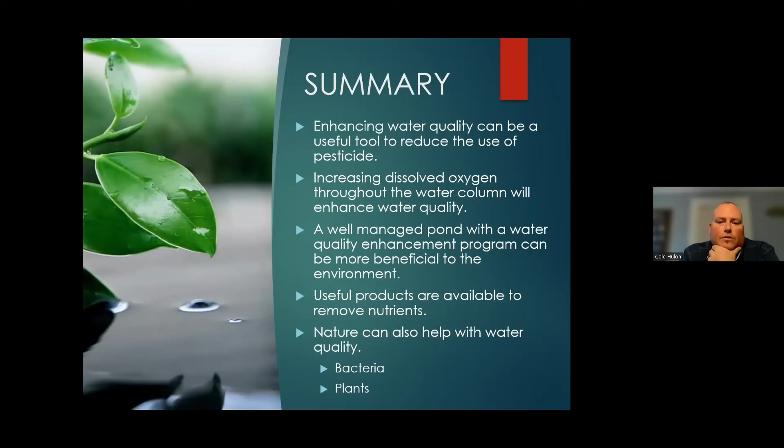Useful products are available to us to help remove these nutrients, and then nature can also help with water quality, whether it's bacteria or plantings.